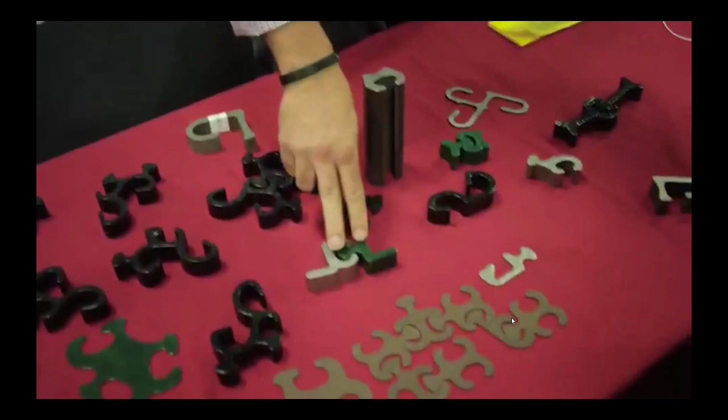I come because I like to learn about what is going on in the industry. I like to hear from the contractors, especially because being an engineer, sometimes it's good to learn from the contractors what innovations they're coming up with, and obviously to meet with other folks and see what they're working on.

This conference is probably the most important event during the calendar year, so you cannot miss it. Because here you can meet a lot of people, contractors, suppliers, competitors. So, as I said, it's the most important event in the calendar for the foundation business, and it's too important not to be here, let's say.

We come because we get a lot of exposure to people who use our equipment. Camaraderie, a lot of camaraderie. Even with our competitors, we come out and we rub shoulders. Everybody knows everybody. It's just one big happy family. Well, it depends on whether or not you want to continue learning. If you've got a desire to continue to learn, then you need to be at DFI.

The good thing about this conference, you can meet a lot of people over and over, so you can make a very good connection with the industry people. Networking's huge. There's so many people here, just from different parts of the country and the state and the world even, and just seeing what processes they're using and their design methods and their equipment, and just really a lot of exposure, and also getting connected with those people for potentially future work, future jobs.

Come join us if you're interested in anything in this industry. This is the place to be. This is it.

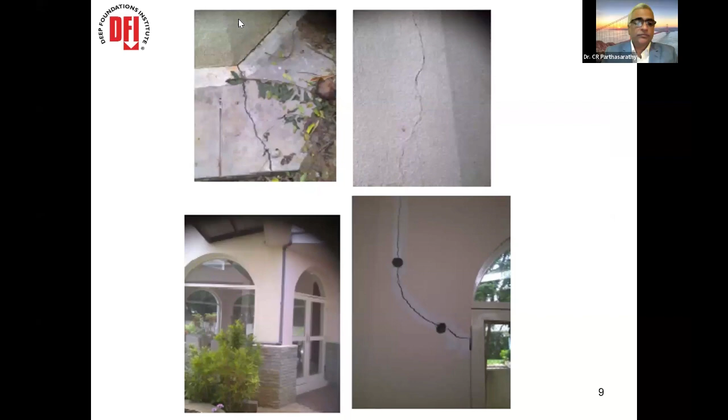So as we all know, any kind of structure, a small residential building or tall towers built on deep foundations or shallow foundations, are subjected to distress. Slope stability failures: even in the recent Wayanad slope failures, hundreds of people lost their lives. We have cases where residential buildings are under distress. A common man like you and me puts our life savings into a building, and then we see that the buildings are under distress. We can't live peacefully and happily.

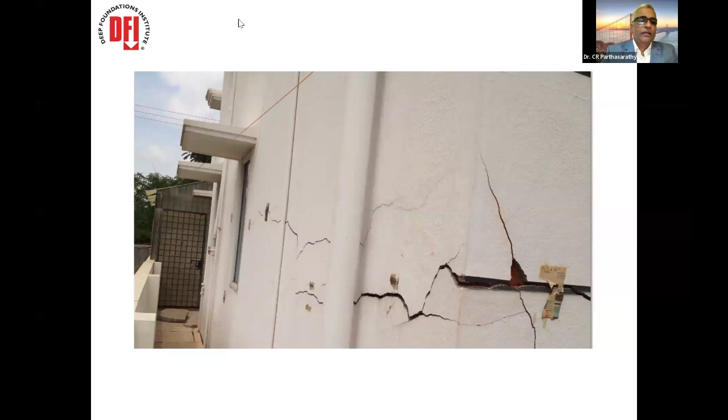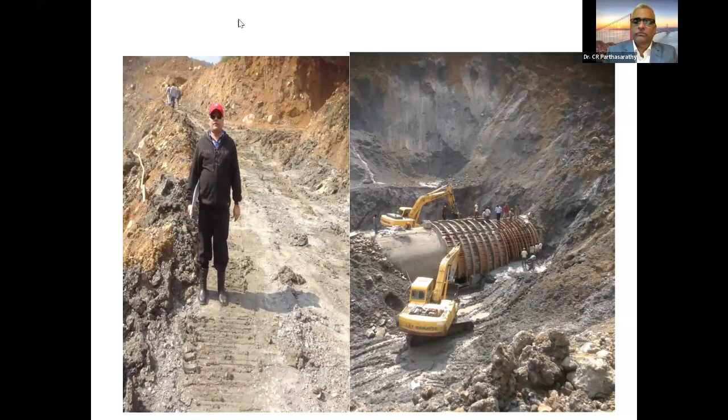Sometimes decisions are made without taking cognizance of the risks involved. Slope failures in cut and cover tunnel. I had an opportunity to visit one of the sites in the northeastern part. No protection, no planning, no safety, and it's all non-technical activities to do work in less time, shortcuts. Okay. We also are familiar with the information available in the public domain.

There are several structures that are under distress. Bridges are collapsing in Darjeeling, Arunachal Pradesh, Kolkata, you name the city, right? Stunning footage of foundation failure of a 3-story building collapse in India. I also had an experience of a building just adjacent to my own apartment a few years before, with loss of 3 lives. One of them was my security, who had nothing to do with the adjacent building, but he was a prey to that incident.

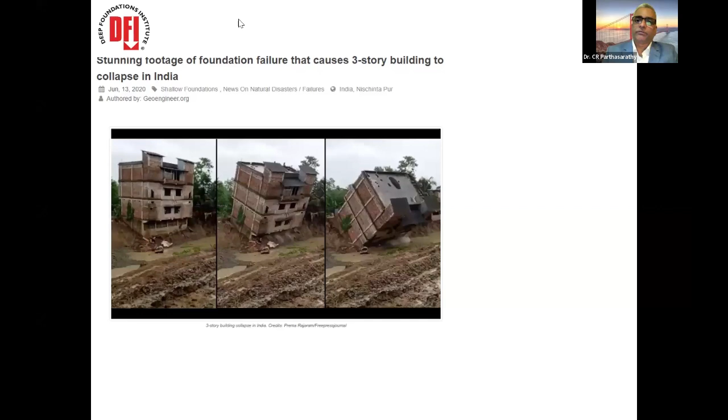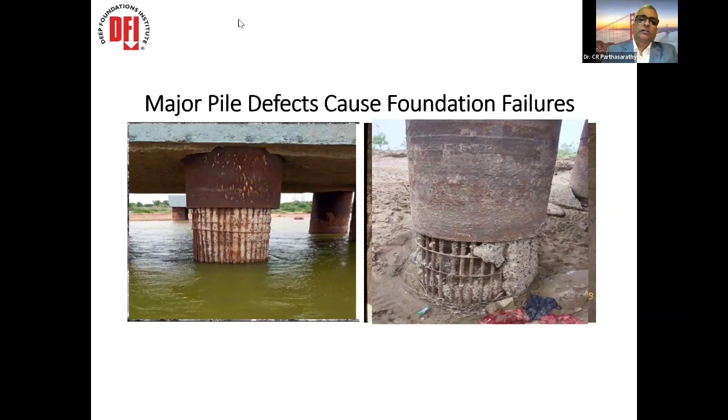Delhi building collapse is a classical example of a tall structure collapse. Recently, 14 Bihar bridges collapsed in 4 weeks. As professionals, it's unacceptable, I think, to every one of us here, right? Sometimes doing shortcuts leads to major defects in the foundation, perhaps erroneous designs leading to higher risk, time overrun, cost overrun. Economics and safety have to be considered. The bridges built unsafe lead to disaster if it's not attended to.

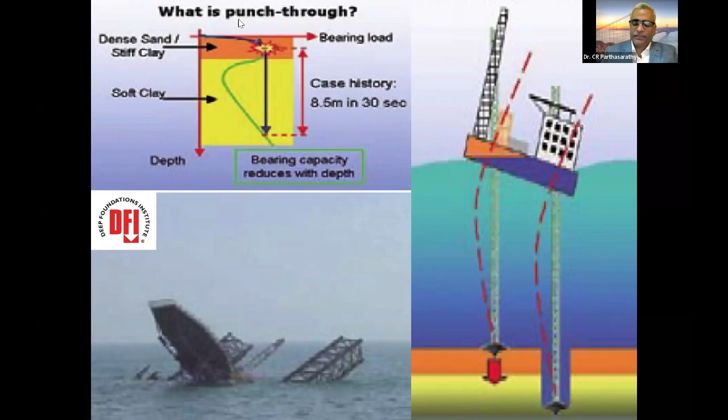It is just not the problem in the on-land infrastructure, but also in the marine offshore condition as well. We know structures are failing. We have these jacket structures coming down. Right. So friends, what are the causes for these challenges and distress? This high failure rate and infrastructure collapse leads to loss of life, loss of money, bad reputation.

It's not good at planning. Rushing takes priority over managing the risks. Financial constraints on projects. More importantly, not using technology, not having skilled people on the project. I emphasize this very strongly because of having some experience in the presentations that I make and also what I hear. It's too late in the game and then people think that they can fix it later. How can we mitigate this? Create awareness, bring in technology, induce skills, transfer knowledge, and have people with the experience learning.

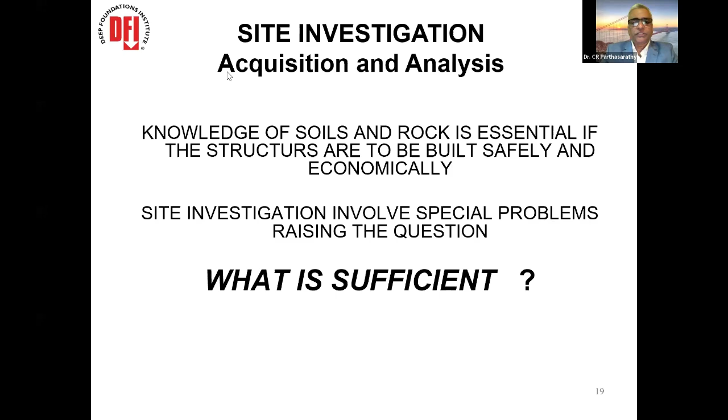Okay. So why is geotechnical investigation and site characterization required and necessary? The investigation is a prerequisite for safe and economical design of the substructure element. It is also necessary to obtain sufficient information for feasibility and economic studies of a proposed project. So this poses a very important question. What is sufficient? The characterization shall be sufficient enough to depict a three-dimensional picture where you can map the lateral continuity or discontinuity of the layers horizontally, as well as stratify the layers vertically and develop the strength parameters. And this information is used for the design of foundations.

So what is the outcome of a thorough or proper site investigation? A, you get to know the stratigraphy. B, you get to know the strength parameters. C, you know what are the risks that this stratigraphy poses on the intended projects and how to mitigate those risks ahead of time so that you can eliminate all those hazards and be successful on the project.

When you're talking India, $1.5 trillion of investment into the infrastructure pipeline is committed from the government in the next several years. They are going to build huge infrastructure across the length and breadth of the country. At this scale, we have serious conflict of the resources available. There is a capacity demand conflict. And it's just not for the infrastructure and other development happening in India alone. India is producing a talent pool that other parts of the world are also looking at. The entire Middle East, we are contributing to the projects.

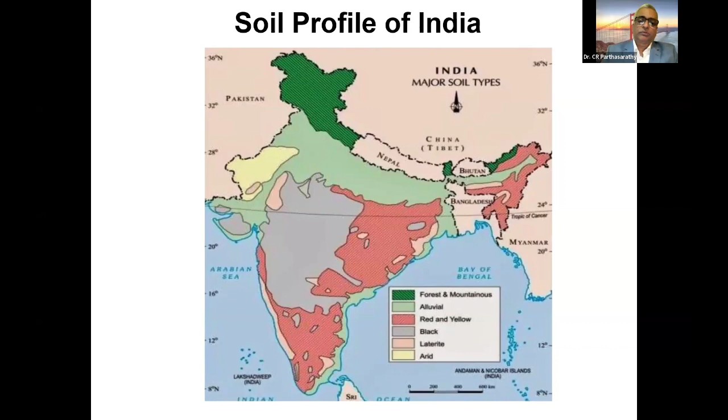So routinely, the standard penetration test has been practiced for decades, more than 85%, and is one of the most used methods in geotechnical characterization, but apparently it is also not a standardized practice in the field. So I want to emphasize a few case studies to see how it can be mitigated and how the current practice is going on.

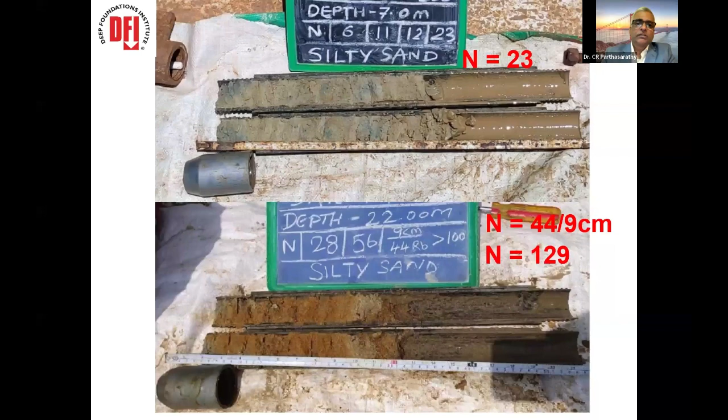So the first-hand information when you look at the data is always the best information. The person standing on the site, maybe a senior technician or an engineer, looks at the samples. He says, yes, these are undisturbed samples. You're driving the SPT split spoon sampler into the virgin ground. Click pictures, record it. Huge value for this information, and also the quantity of material that is collected. So all the drill fluid, the wash cuttings are taken out. You're also ensuring that the penetration is happening into the virgin ground.

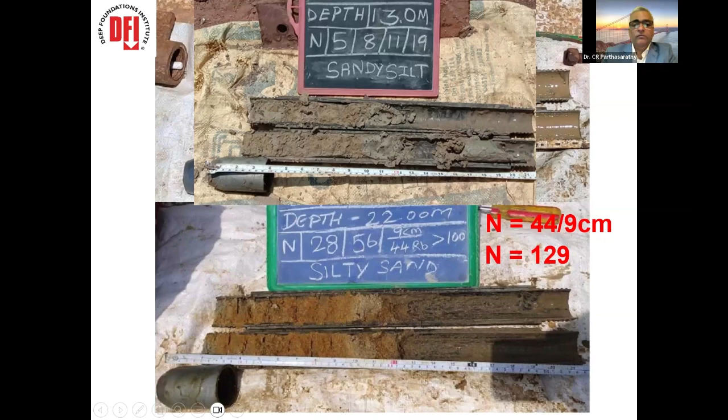If you have a very competent material, a refusal stratum where the split spoon is not penetrating with the hammer blows, at least you know that this is the original material that you have hit, and you are confident that there is competent material at the intended depth. These are very simple things, ladies and gentlemen, but they give immense value for you to make decisions in the current scheme of things.

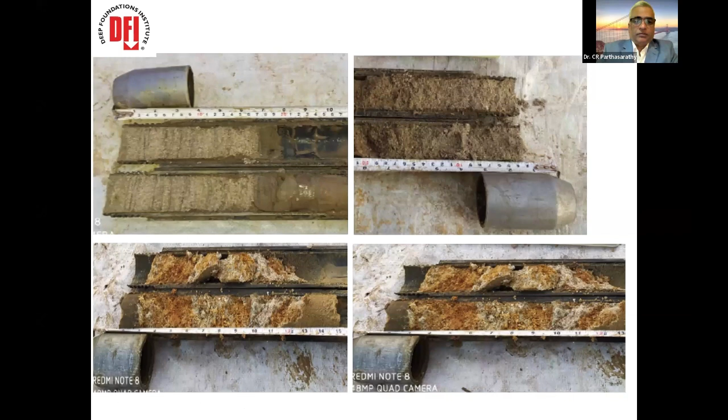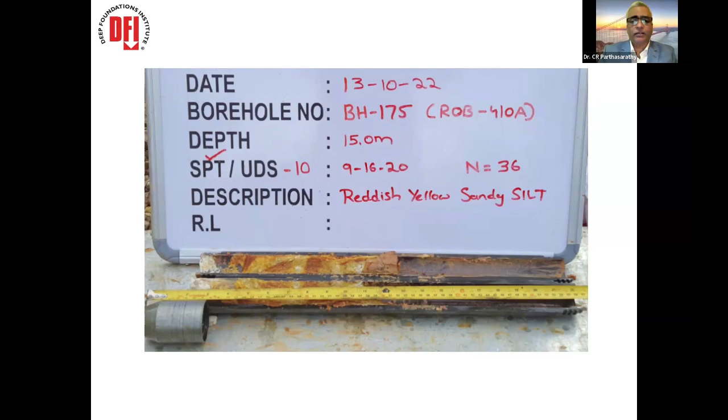Even in sand, you need to know if this is real undisturbed ground or virgin ground you are conducting the test in, or is it something else, right? Many more. So it should be a practice that we collect on-site first-hand information with proper testing.

Oftentimes, we also see that there are no samples recovered in the test because it's very, very competent, and boreholes are continued without doing any other remedial measures. So if you see a refusal with no samples, the next thing probably is very competent. You may have to core it to see if there is any material that is coming out.

But we see oftentimes that the boreholes are continued and these no-recovery samples continue to the end of the borehole. So you don't have a sample and you're only left with a refusal R value, sometimes it's 100, sometimes it's 50, whatever the user writes there, and we have to deal with that.

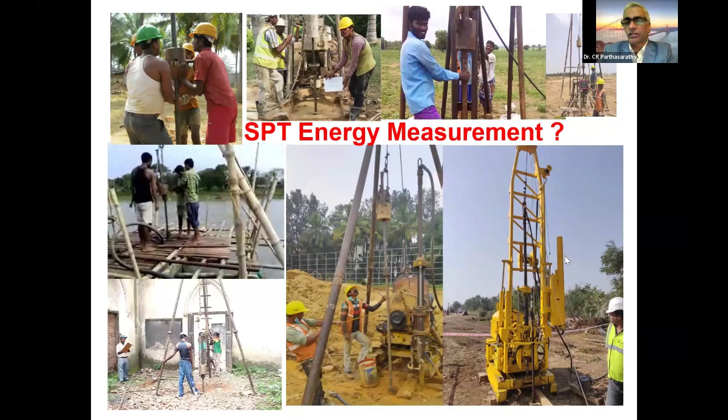Conducting this test itself, although it's the standard penetration test, it's not standard. We are not sure how much energy is transferred to the drill rod. So we have actually calibrated several rigs operating in the region, and we found that tests performed with a rope and a pulley impart only about 25 to 40% energy transfer. But if you use an auto trip hammer, which the codes prescribe, we end up having about 55 to 65%.

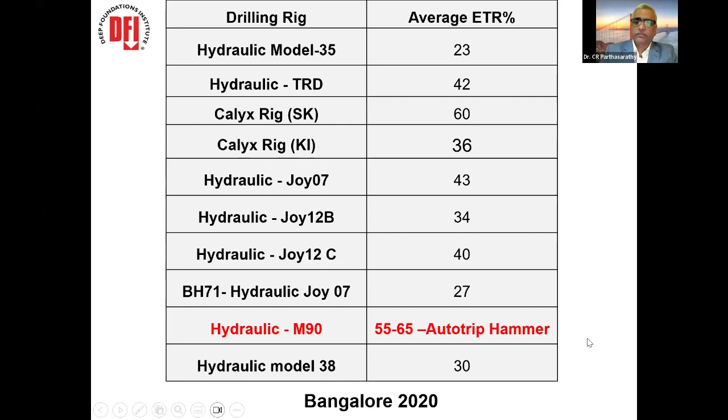With the conventional empirical equations, we do not want to have any adjustment if you use an auto trip hammer, but there is a huge adjustment which over-predicts the bearing capacity. And therefore it's imperative that we calibrate the rigs operating on a project. We did that on many occasions. For several of the rigs, we found again this 25 to 40% with more database.

In fact, this energy measurement started with the high-speed rail project during COVID time in India. The Japanese wanted to have this measured for every rig, and now it is pretty much a practice. Although it's not 100%, on important projects energy measurement has been made, but equally there are projects which don't even prescribe this energy measurement.

Our Indian Standard Code IS 2131 specifies field correction using energy measurement, not mandatorily, but as an option. So I hope in the subsequent revision they make it mandatory. In the Western world it has become pretty much common in most of their projects.

If you are using a high-end drilling rig with an automatic hammer, you also tend to have a very high energy transfer; 80–90% and above is not uncommon. So when you're still using the current empirical equations, not correcting for this high energy transfer will be detrimental to the economics of the foundation.

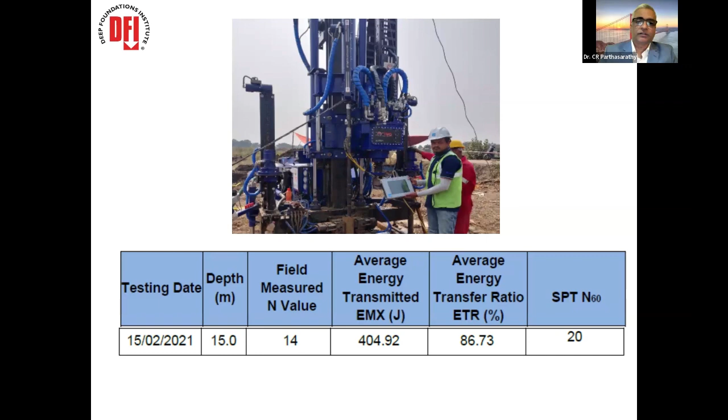Just to give you an example, a pile capacity based on only the overburden correction, and this is based on field corrections using the energy, you are multiplying a factor of 1.3 or 1.4 as the case may be. For a 600 metric tons of required capacity, you end up having a 7-meter difference in the pile length. And same way, if it is for 1,000 metric tons capacity, it's 42 to 47, 48%, about 6–7 meters of pile length. Thousands of piles you're constructing and huge cost savings you can economize.

And this economy of foundation is not only on piles. There are also published literatures on tank foundations not doing ground improvement because they have adopted the corrected N values based on energy measurements, which otherwise would have cost them millions of dollars in the ground improvement.

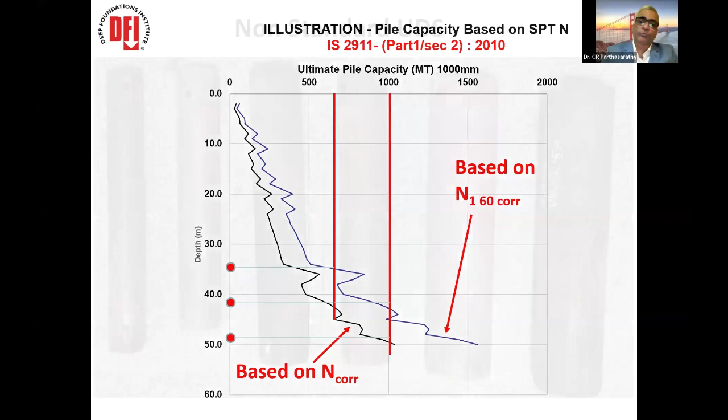So field part is one, so you need to have good first-hand information. Properly, you should be able to identify it is a good sample, a bad sample, energy measurements, and correct it and normalize it. That will actually elevate the standards of work that we are doing. So now, in situ test is one part, laboratory test is another part. In order to perform high quality laboratory test, you also need to have high quality undisturbed samples.

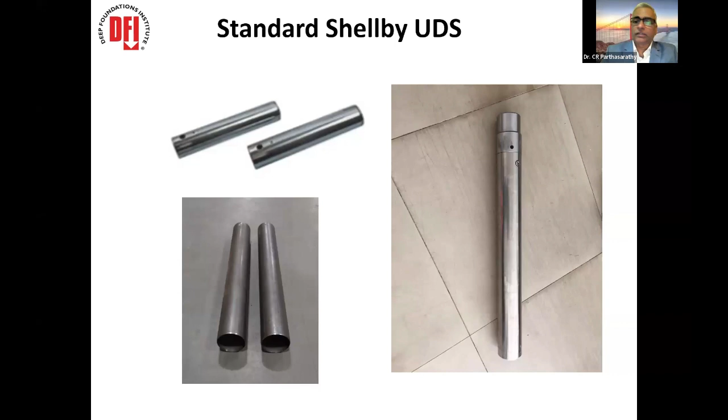So we are having varied samplers, although prescriptions are to use Shelby tubes, which have a good area ratio that can make the samples high quality with least disturbance. So this should be a practice, and in most of the cases today we are seeing these tubes are driven in the ground because there is no capacity of the rigs to push statically. So many projects drive the undisturbed sampler, which actually disturbs the samples too.

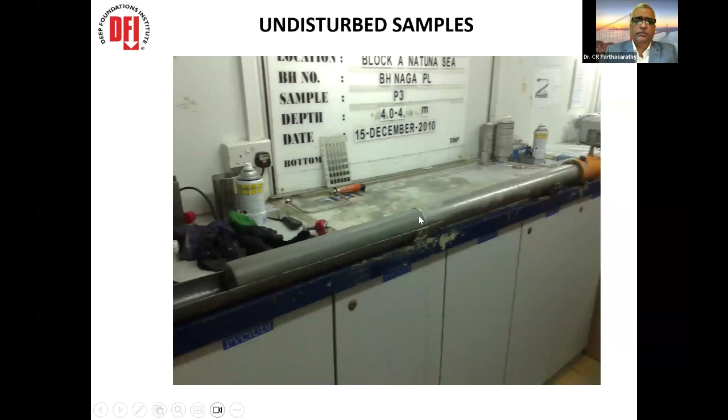And when we are performing a high quality, sophisticated test, no matter how high quality or high value those tests can bring in, these samples are very, very critical to meet those objectives. If you are able to push good samples, even in soft clays, you can recover high quality samples.

But oftentimes, if you're not taking care of the drilling process, you may end up having all the fines washed away, and you see those wash samples coming to the ground, and we're trying to collect them in a plastic bag, and you characterize that these are all cohesionless material, although the matrix is different; as a mass it is all clayey sand or sandy clay. So we end up having the wrong classification of the material.

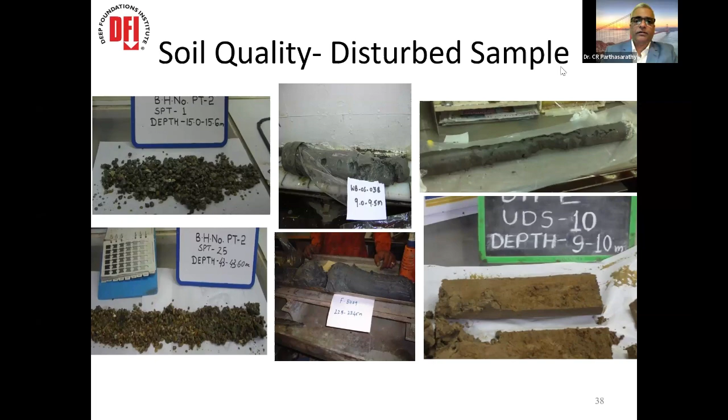And same thing you're seeing on the left side. These are not the gravels and the pebbles. These are clayey sand with some amount of gravel. Well, all the fines are gone because you're not able to wash the boreholes properly, and thereby you're ending up in wrong characterizations. So wrong characterizations also have a cascading effect on your decisions over the life cycle of the project.

Rock cores are another important aspect. Once you see the refusal stratum, the next step is to see that you can collect core samples using the core barrels and the other tools. A very important aspect here is to ensure that you are using the right type of tools, particularly the bits, the reamer shells, the core catchers, and what kind of bits you are using. So what its hardness is depends on the material that you are coring in.

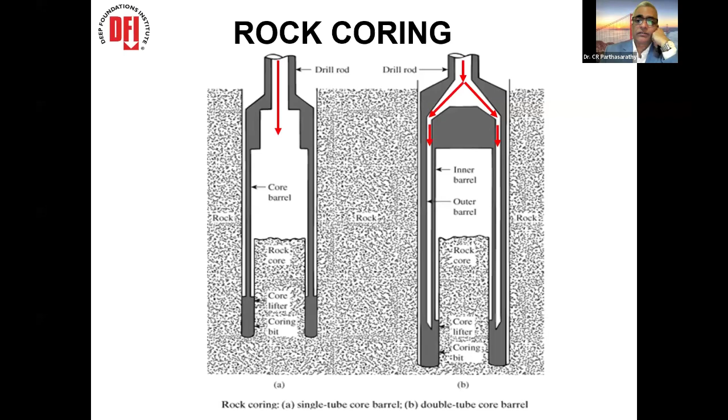Here, you definitely require to understand these drilling aspects, coring aspects, and what kinds of tools are necessary. Otherwise, using the wrong tools will end up not having any progress, or you're going to have some bad quality core samples. Even using triple tube core barrel is not an uncommon practice. It's definitely required for transition layers in residual deposits to collect those intermediate layers and quantify those layers.

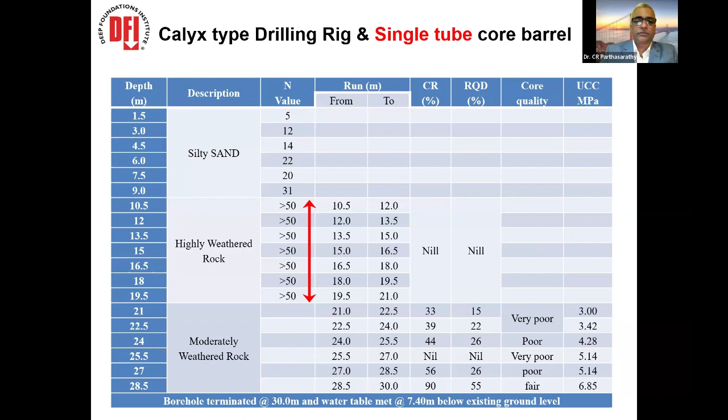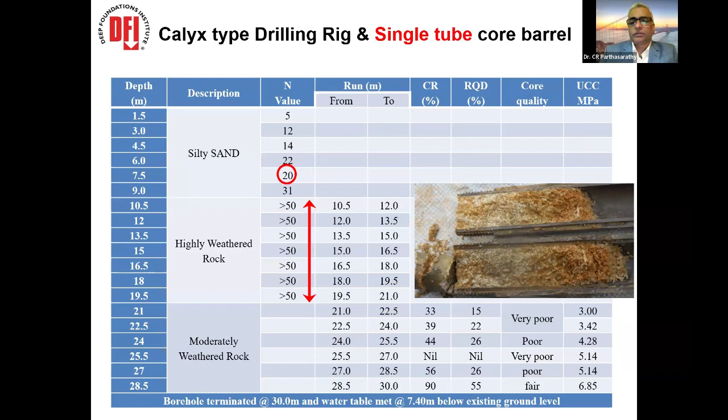I'll give you one example. When you have overburden up to 9 meters, then you have this refusal to SPT. We just record it as N equal to 50 at all the depths until about 20 meters. And then you have this bedrock. So there's no core recovery, there is no RQD. So we end up having only N equal to 50, maybe no samples. And we tend to use those N equal to 50, or now N equal to 100, to evaluate your bearing capacity, pile capacity, and so on.

But with a simple change in the tooling, you use a triple tube core barrel and try to core the material. You will end up having good core samples with decent recovery and also a good amount of samples that you can test, to ensure your unconfined compressive strengths are measured around 3 megapascals.

So in the absence of triple tube core barrels, we tend to underpredict the bearing capacity. But more than just the bearing capacity scenario, it also leads to other risks. For example, the excavation in this material. So if you have a Poclain which can excavate this overburden, and for sheet rock, you have many other means of excavation, diamond cutting and others. But this intermediate layer is neither an overburden nor a sheet rock, so there's always a conflict.

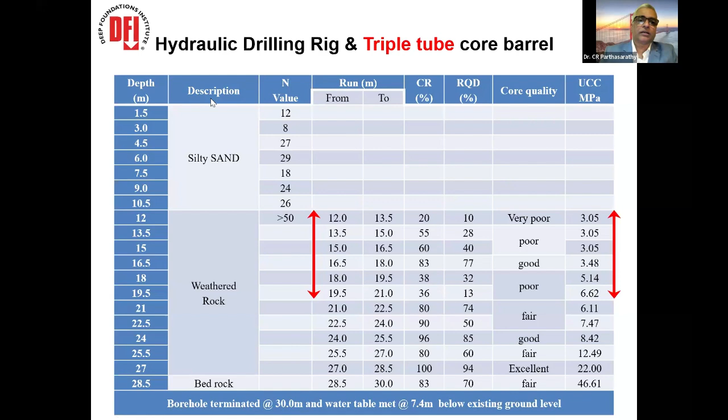As we speak, I know there are 2 projects under litigation between the owner and the contractor because it's not quantified properly. So proper quantification helps mitigate these risks and also avoid conflict, which can also minimize the time and the cost overrun on the project.

So with this simple quality on the collection of core samples using triple tubes, you can actually predict a higher pile capacity, or foundation capacity. Just as an illustration I've given here, based on N equal to 50, where your allowable capacity on the point bearing is around 1 MPa, it could be around 5.5 MPa because you have a measured unconfined compressive strength.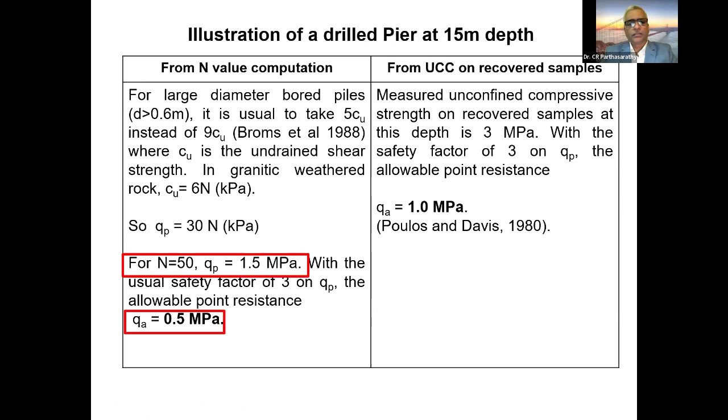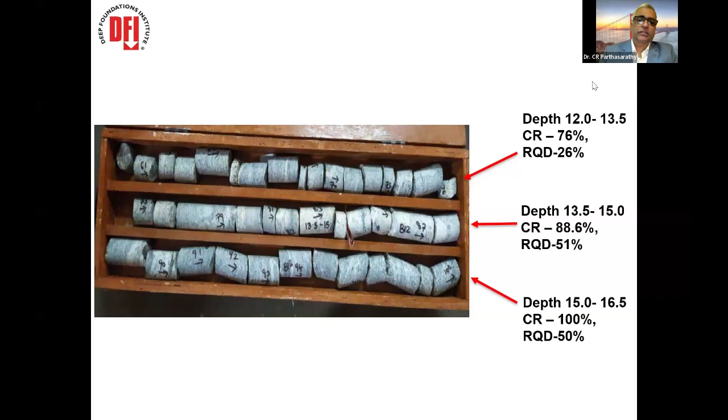Now, our IS code also gives a guideline to classify this rock mass. So these are fresh rocks, broken pieces, and if you classify this rock, it is classified as a poor rock because it's already broken. So is the rock so bad that you get these broken pieces, or is it something else? I think it's drilling disturbance having mechanical fractures.

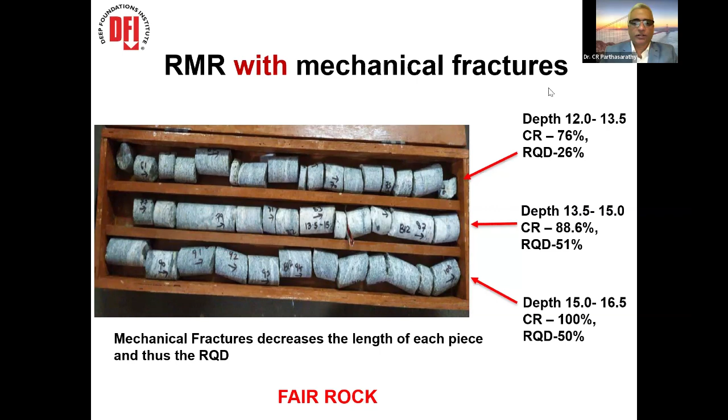So when you have this rock mass rating with these mechanical fractures, you classify this as a fair rock. But if you use some good drilling tools and collect good core samples, I'm sure you can get a nice core in this kind of fresh rock. Your fair rock can be classified as good rock. So in such a case, experienced geologists tend to group those core samples and improve the RQD. I don't encourage this. This is the last resort.

But for all our young colleagues and friends here, please try to do a good job in the first place. Okay. So in trying to group, you're improving the RQD, then you're trying to improve the rock mass from fair to good. This is a last resort.

I repeat again, the first thing is to ensure that you collect high quality core samples by implementing good practices: put a good rig, put some good geologists on the site, and also use good consumables on the project, like your drilling bits and other tooling as appropriate to the material encountered, and thereby you'll be able to recover good core samples. Let me illustrate a few examples, and then we will take some questions.

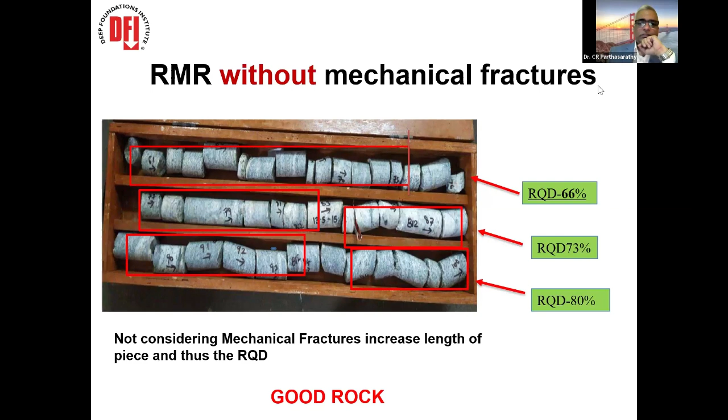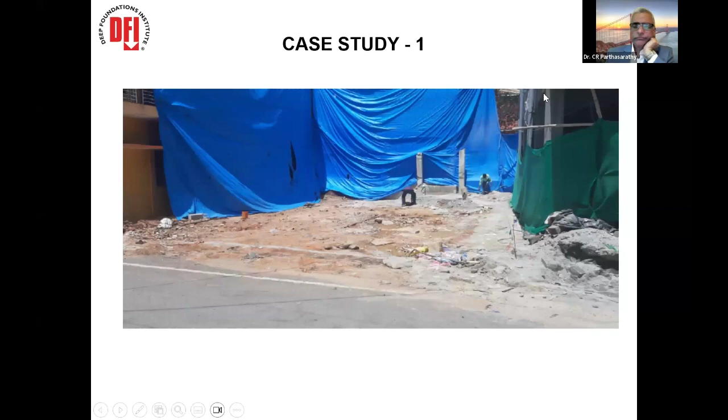This is a very small project, small site, 30 by 40 feet. One of the owners intended to build a residential building of 2-3 floors. As usual, you do a borehole by manual augering. It's very common in Bangalore and other regions. I've seen that a manual auger is used, and you get your N values.

And the owner of this building is a project management professional who handles crores of rupees projects across the country. Looking at these N values, which are very, very weak, around 2 to 4, he is a little concerned about his own building. Then he said, no, we don't want to go by this. So let's have another investigation using a machine.

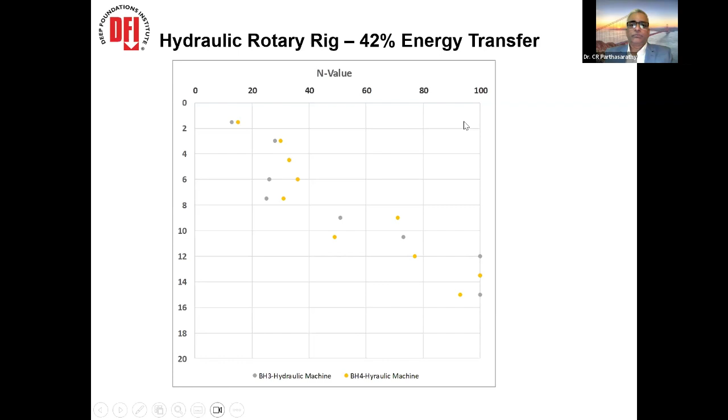A hydraulic machine, you make energy measurements, which results in N values higher than what the auger boreholes gave you, right? Again, conflicting information, puzzled, unable to make a decision. Then you correct it for overburden and energy, and then you get this, okay? There are two values available for you. What is right? Don't know. So people are puzzled.

The only way that you can decide on this is to have first-hand information on the ground. If the people on the ground do not give you first-hand information, then it's very, very difficult. So better you go to the site, look at the surroundings, look at the soil samples, and arrive at your own judgment.

From this investigation, there were some samples that were collected. When you actually examine the samples, this was tested for shear strength, and the sample is standing on its own.

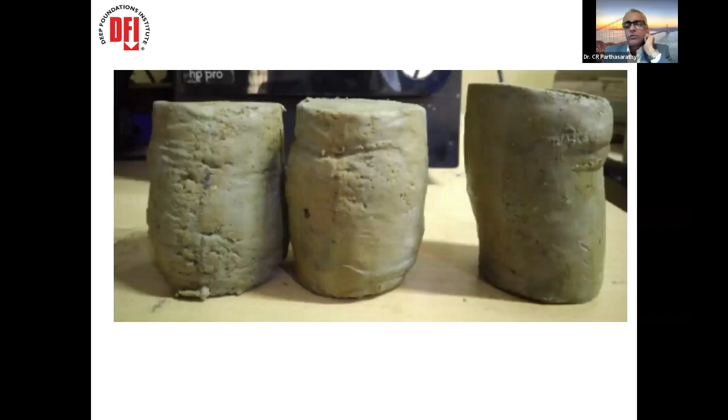Okay, and it yields an undrained shear strength of about 50 kilopascal. So when you examine this soil, these are stiff clays, right? So with stiff clay, the N value cannot be 2 or 3. It should be slightly higher. With our normal correlation of 5 times N is your shear strength, you back-calculate N equal to 10, which corresponds to those values developed by the machine, not the auger.

So with a high water table in the auger boreholes, you tend to screw the auger into the ground, and with so much force you pull, there's a suction created which actually disturbs the ground, and if you perform an SPT, you will not get any value. So it's a simple technique, and I was able to analyze this because 30 years back, I myself worked for 5 years on these auger boreholes, about 600 to 700 projects. So something is not correct there.

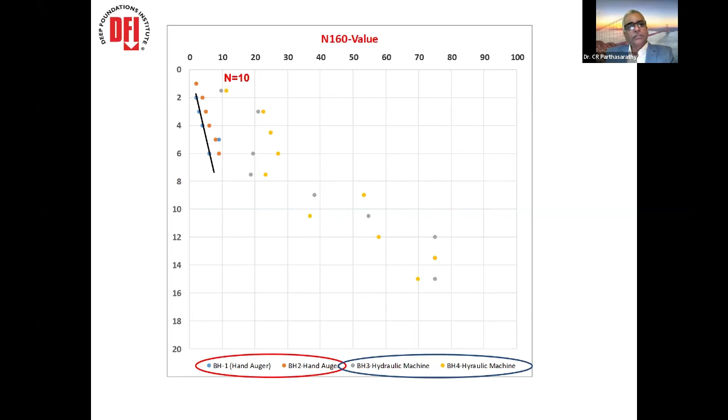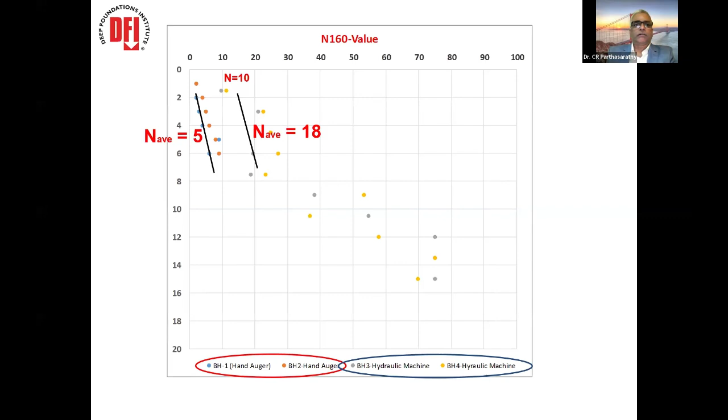And when we look at the samples, it's showing something different, contrary to the N value measured by the auger boreholes. Then we discarded that and took the values from the machine. And look at the site, the adjacent building is constructed for 4 floors and is standing just next to this building. So that also gave confidence that what we evaluated is the right thing, and we asked them to proceed further with the construction.

This is the adjacent building already standing for 4 floors, and this one about 2-3 floors. And finally, the building was completed. Now the owner is happy in the building. So what is one thing that we can relate in this project? The proper skill that you require to identify a soft clay against a stiff clay. Simple things, but we do not have this skill on the site, on the projects, in most cases.

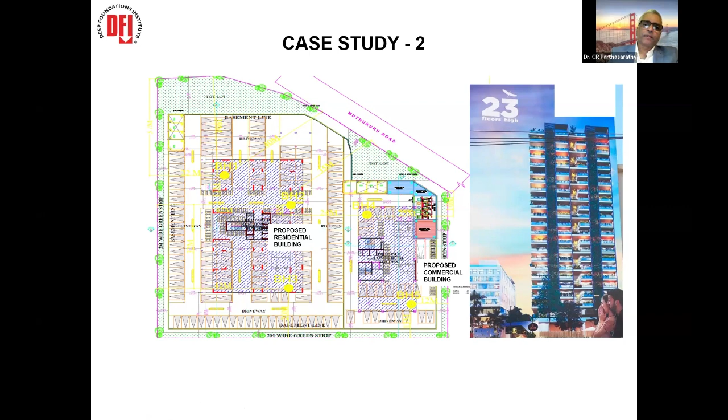Another one, this was one of the projects in Andhra Pradesh. They had a huge land parcel. They planned a 23-story tower on one side and a commercial building on the other side, a small piece of land on the commercial side. A local contractor was engaged to do the investigation, and all the information you have, which you are seeing on the screen, is N values.

Is this a standard N value? Is it measured with energy? No information. I'm sure there is no energy measurement, nor was the practice a standard practice. There were no auto trip hammers, I believe. It's rope and pulley, and even the rope would be a wire line, steel wires, that would actually give you very wrong information on those measurements.

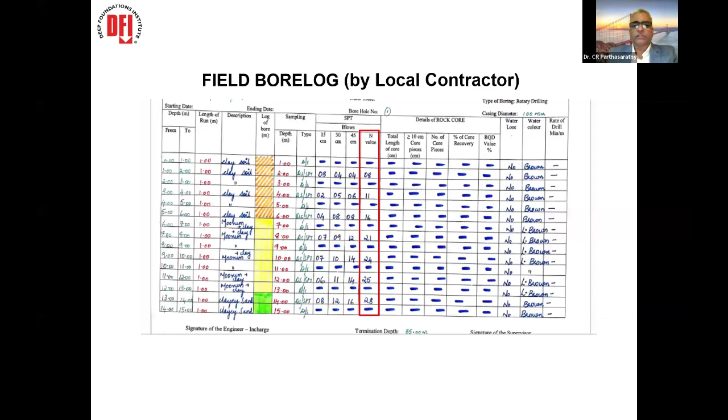So this was used by the consultant, and you see the N values plot so nicely. All of them are plotting together. It's very surprising. And from these N values, it was concluded that you have to go for a piled raft system, that the current stratigraphy is unable to withstand the load from that high-rise building. So given the stratigraphy and the strength parameters, the consultant said that, in my opinion, the piled raft system appears to be more appropriate for the site.

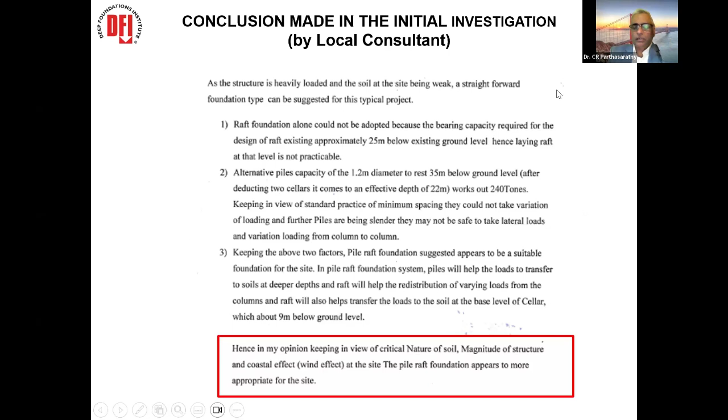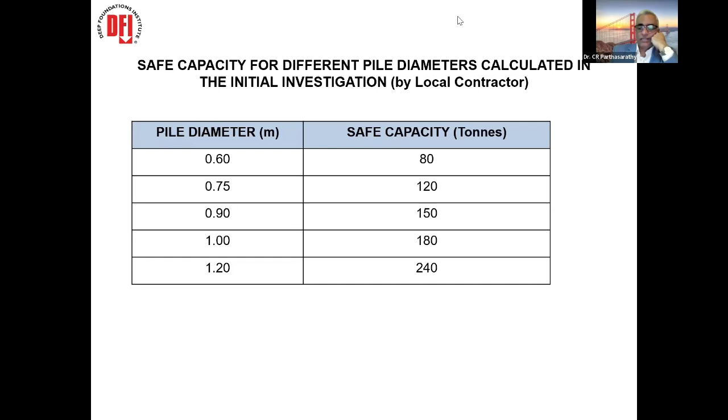This cost a lot of money for the structural engineer, and he was not happy, since the structural engineer himself visited the site when the excavation was made. Somehow he felt that this was contrary to the site conditions. So a reinvestigation was proposed, and here are the boreholes where the reinvestigations have been performed.

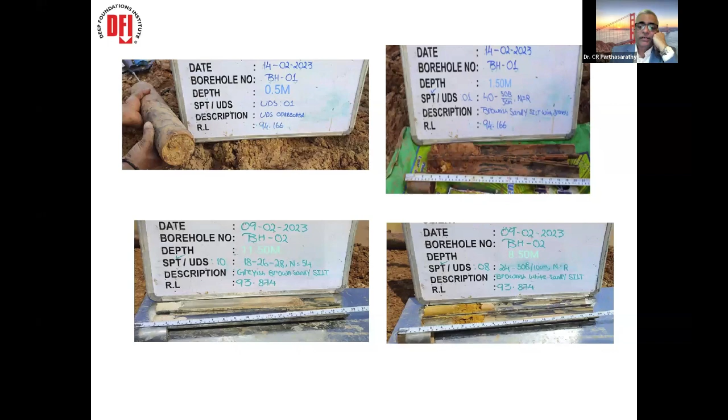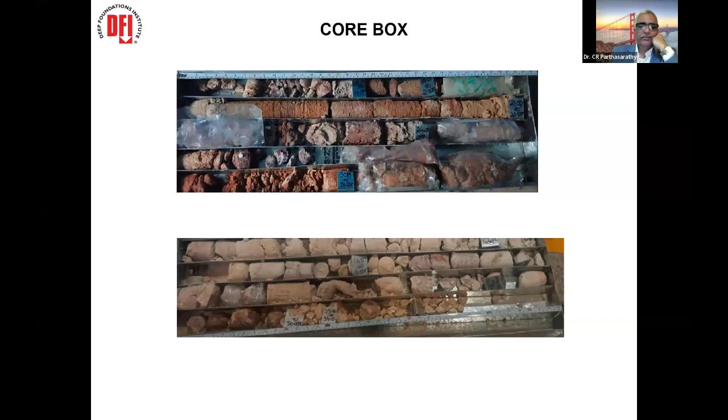The samples were collected, and you could see the refusal stratum at a very shallow depth. And the refusal stratum was not even met up to 35-meter depth in the initial case. And there are cemented rock layers, cemented compact material. And it's totally different, 180 degrees apart from the previous investigation to this investigation. So with this latest information, first-hand information, there weren't any samples in the earlier investigations to look at.

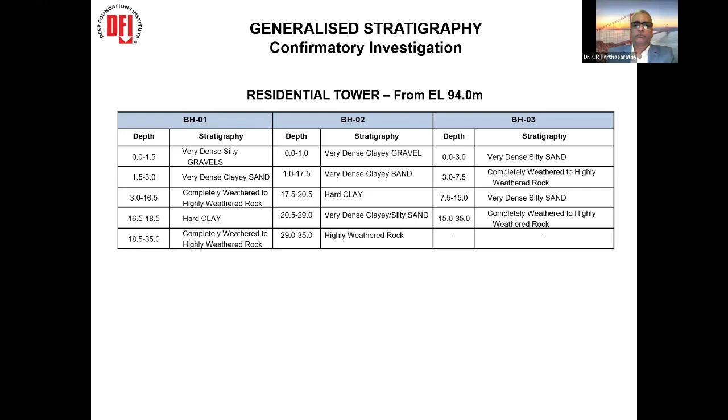You have very high confidence that you can vouch for this material because you have physical observation, and also the samples are collected and tested in the laboratory. There are field tests also being performed. Then the ground model was developed. And finally, it was recommended to go for a raft for the high-rise building and normal isolated footings for the commercial building.

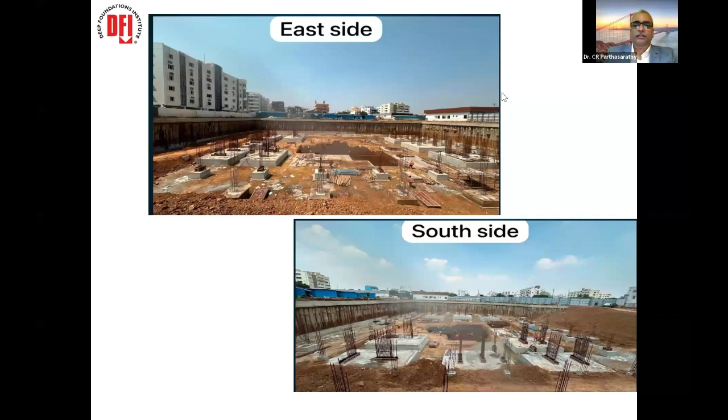Okay. Now, in the building, 2 months back, they already started with isolated footings and intermittent raft. I think now probably several floors would have already come up. So there's something common between the previous one and this one. So what is common between the previous and this one? Please type it out in the chat box. I'll come back and see after my presentation.

So I acknowledge the team that was involved in this project very professionally at all stages, including the site, for thorough management, data acquisition from the site, in situ testing, there were geophysical methods, pressure meter, and so on, laboratory tests performed, and also the engineering report, which apparently saved, I think, crores of rupees to the project.

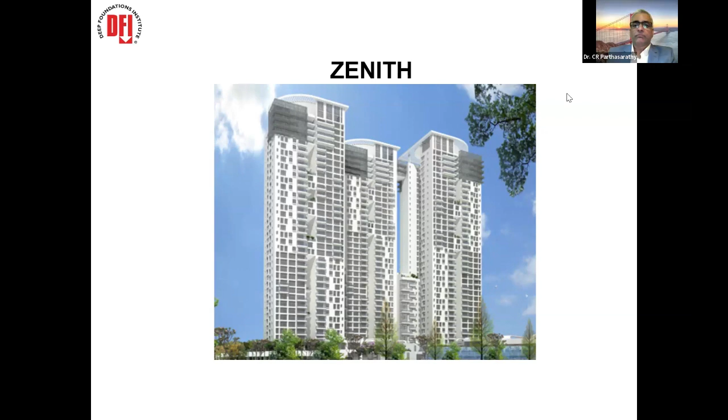We did not get paid for many crores, but we are talking about sustainability. I think doing the right thing in the first place is the way to go, right? And we had similar experiences in the past, several years before, on this building, Mantri Espana, and this is Zenith Towers. It's on the airport highway, doing reinvestigations and actually eliminating pile foundation on this project, tall towers.

Where it is not necessary, you don't need piles. Where it is necessary, you tend to use piles. So thorough investigations are required on any project, and this can come only when you have the right attitude with the right people at the right place at the right time. Okay.

This was a refinery project for tank farms. So for one of the tank farms, I just picked up 2 boreholes here, which gave N values, as you can see here, location 1 and 2. And you have the refusal stratum below 15 meters.

But the rods that were used were not standard rods. They were non-standard rods. Then you tend to redo it on a bump-over borehole. Okay, it's an adjacent borehole. Repeat this again with standard boreholes with standard energy measurements. You tend to have the N values contrary to the previous ones.

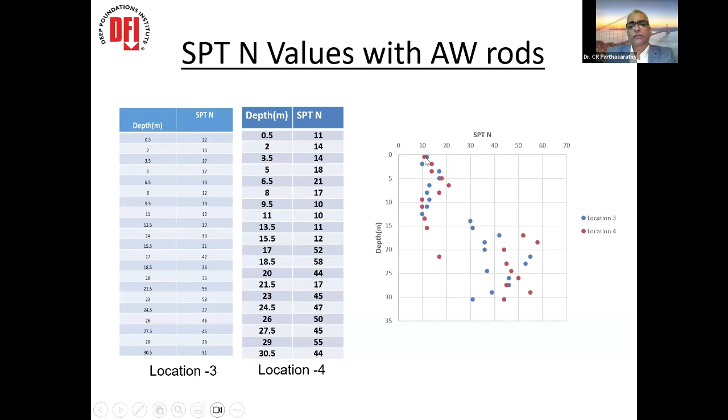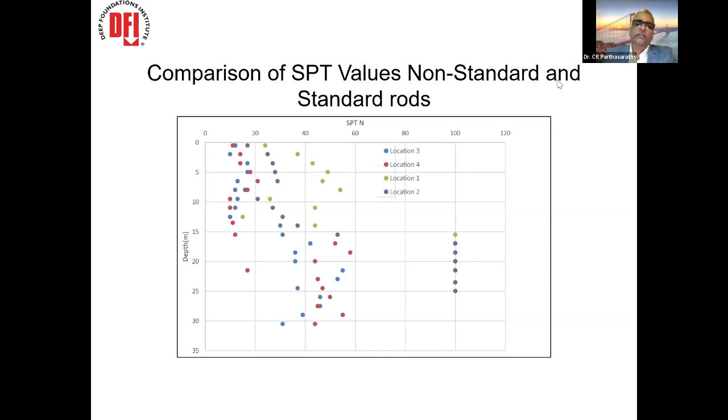Okay, now you put everything together. Some of those rigs are telling you it's a refusal stratum, and the other rigs are not indicating any refusal. Same contractor with different rigs or different contractor, doesn't matter. As long as we follow the procedure, I think the data should be okay, right? We tend to use that.

The second one gave you less N values, and this also corroborated very well with an adjacent CPT test that was performed up to the depth intended. So the CPT and SPT correlations gave confidence that we have to use the standard rods and ignore those values that came from non-standard rods without any energy measurements.

Okay, this has a huge impact on the foundation assessment, particularly when you are making settlement computations on the projects. So thereby we are able to solve these problems and overcome the risk that would otherwise have predicted lesser settlements than the current ones.

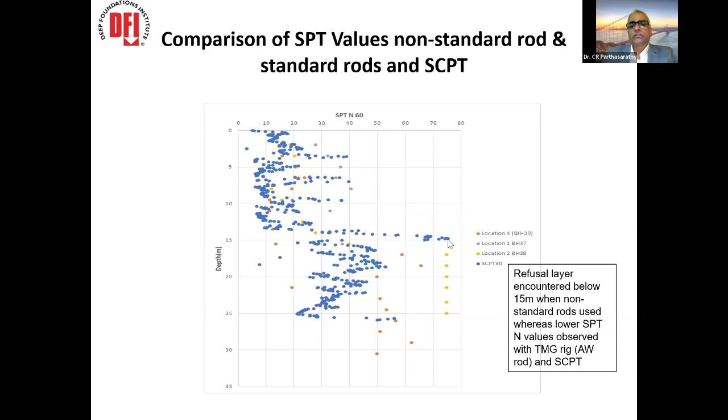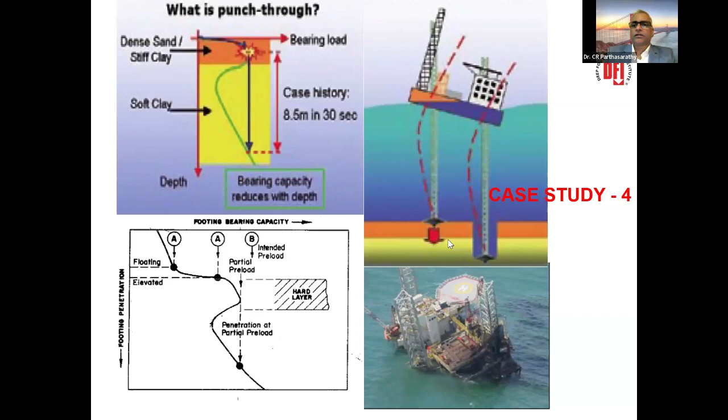2 factors are important. One is the factor of safety, peak bearing capacity to the preload, and the measured to required strength ratio. This should be close to unity and this should be more than 1.5. So you don't have any failure or rapid leg penetration.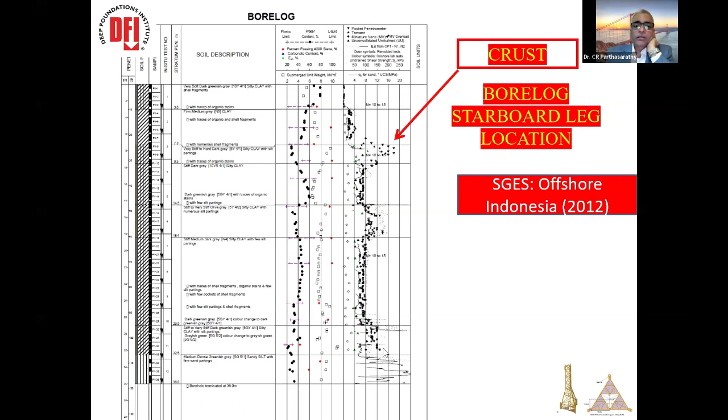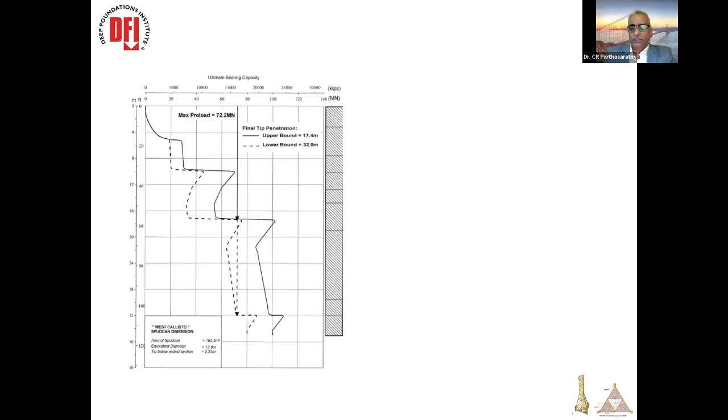The contractor arrived at 32 meters of leg penetration. With this leg penetration, which was predicted, the rig that was chartered was not usable on the project because it didn't have enough leg length. The client was puzzled. Then we really looked into the data, and we predicted it could only be 9 to 14 meters.

How confident are you on these predictions, contrary to the contractor? This was about 10 years back. I personally was managing this large-scale geotechnical investigation. And I made a decision to terminate the borehole at 35 meters because I predicted the rig will stop at the top of the crustal layer because there's a stiff clay at the bottom layers.

And you need to have around 1.5 to 2 times the diameter of the foundation, or the spud cans we call, below the predicted level. And that 35 meters was good. So I was totally confident because you had first-hand information, you had a feel of the soil for yourself, and then you had measurements witnessed on board.

So the client did use this data, and the rig went to the location. It experienced similar penetration, and later on the jacket was installed, and we were also involved with another contractor for the pile driving monitoring as well on the same project.

So why this contractor predicted deeper penetration is because they were not able to develop a strength profile, particularly undrained shear strength, that was relevant to the site. So under-predicting the shear strength led to deeper penetration.

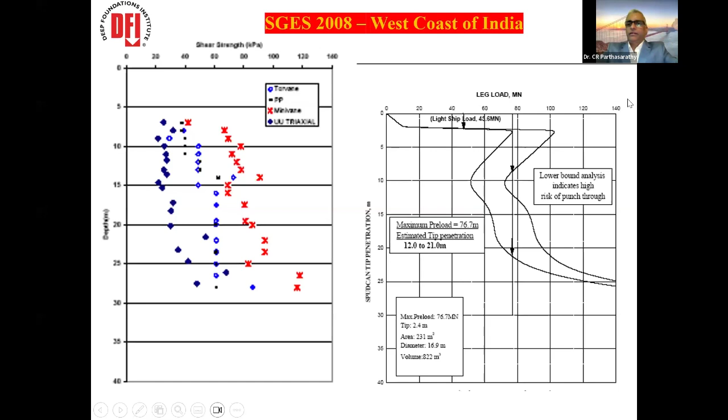So with this very low shear strength profile, you end up having a leg penetration like this, indicating that the legs will have a rapid penetration from here until here. No warranty surveyor will approve this kind of high-risk location. There was something not okay with this data because there were many rigs operating in the region. The client was puzzled. Then it was decided to go back and redo the investigation.

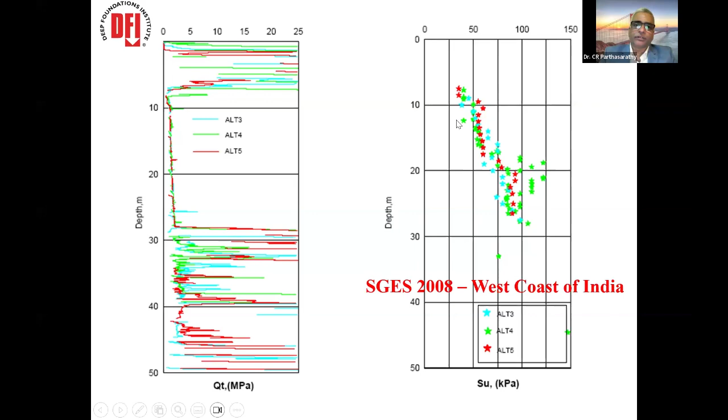An expensive, costly affair. Now everything is on top of each other under strict supervision, both the in situ testing as well as the measured shear strength, unlike the previous case. So this resulted in no risk, where all the legs of the jackup rig would stop at the top of the layer. Similar thing: wrong characterization of the soils.

The torvane test we use is a very simple test. You need to put the blade into the soil and shear with a uniform vertical pressure. But the skill of the operator who does the test is very important. Instead of shearing, it tends to slip, and it under-predicts the shear strength. That's one reason. The other reason is the calibration of the proving rings was not available, so they used the wrong conversion factor and reported very soft clays, although the clay was stiff clay.

But the person doing the testing should be able to feel for himself whether it's soft clay or stiff clay. Just by punching your finger into the material, you should be able to find out the consistency of the material. That is where the skill is required. It's a huge cost.

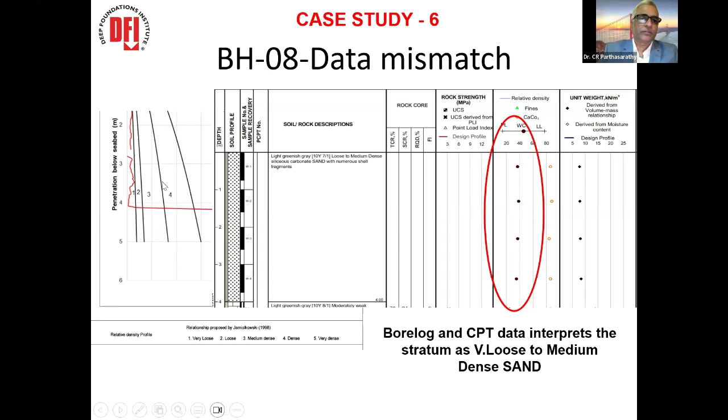The last one is a shallow borehole, a 3-4 meter borehole. You see the water content is around 40%. The CPT data tells us it's cohesionless material, very loose in relative density. This is a Jamiolkowski curve for interpretation of CPT data. When you go to the laboratory, you have a different moisture content and also a friction angle of 38 degrees. This is for a pipeline project.

If you have this disparity in the parameters, it has a huge impact on your pipeline design. If it's dense sand, the pipeline will not undergo any embedment, which has issues with lateral buckling or the stability of the pipeline. But the material is very loose and the CPT is penetrating with a very low cone resistance. So you can't have contradicting information between the field and the lab. Okay.

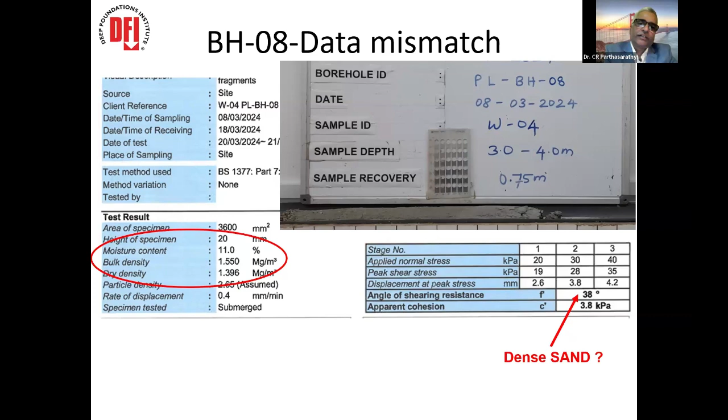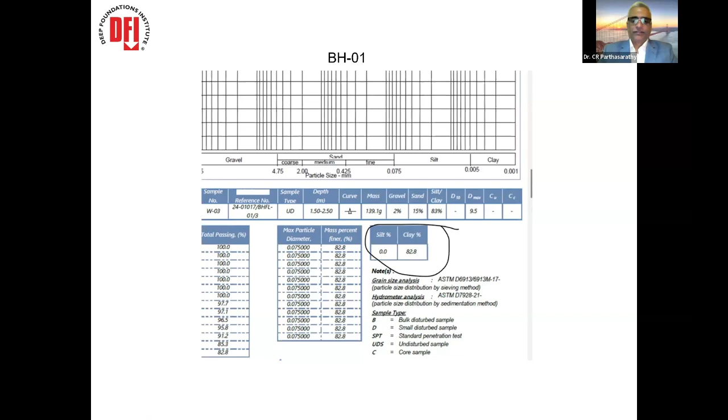And this one again: description of the material is also equally important. You say it is sand and report a friction angle, but when you look at the grain size distribution of the same sample, it ends up having 82% clay. So should you consider a drained case or an undrained case in your analysis? People are puzzled. A lot of rift between different stakeholders on a project.

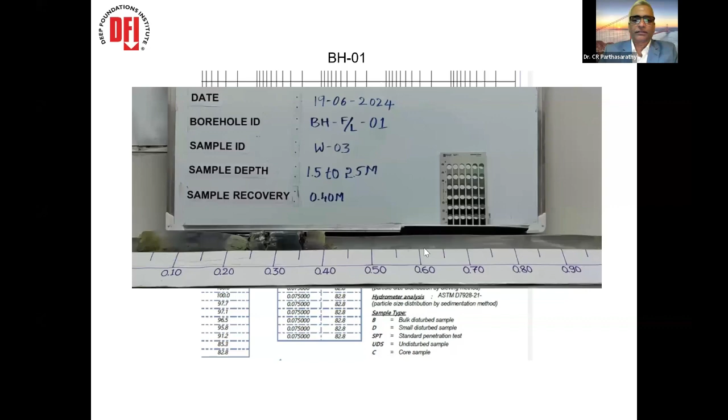And finally, this is a clayey sand. It's not that 82%; somewhere something is wrong. We're trying to investigate. So all of them have one thing in common. Can you please put it in the chat box? What is the one thing in common in all these case studies that I have just explained to you?

So in summary, you need to have an integrated approach to site survey, including geophysics, which I did not talk about today because of paucity of time.

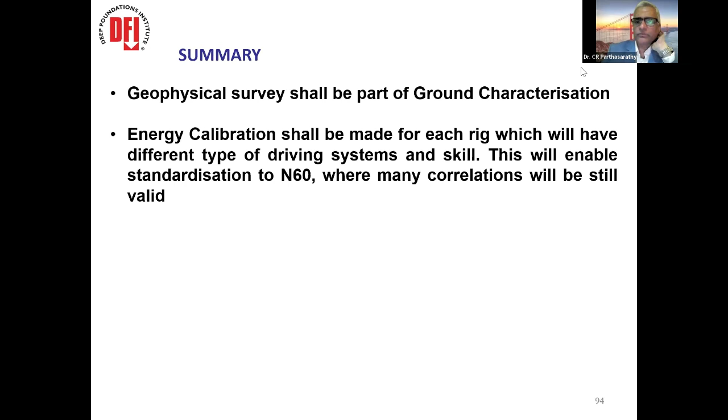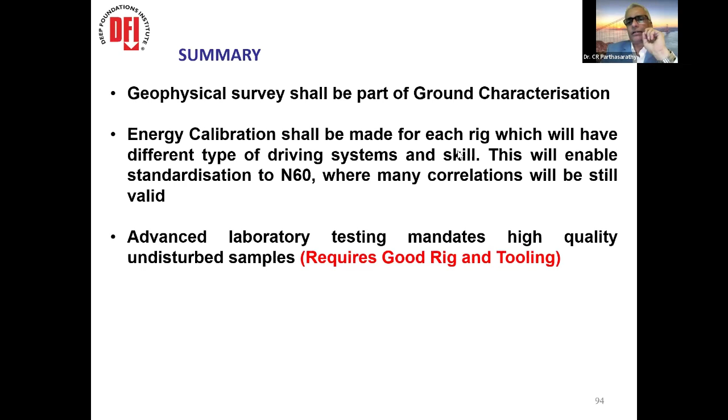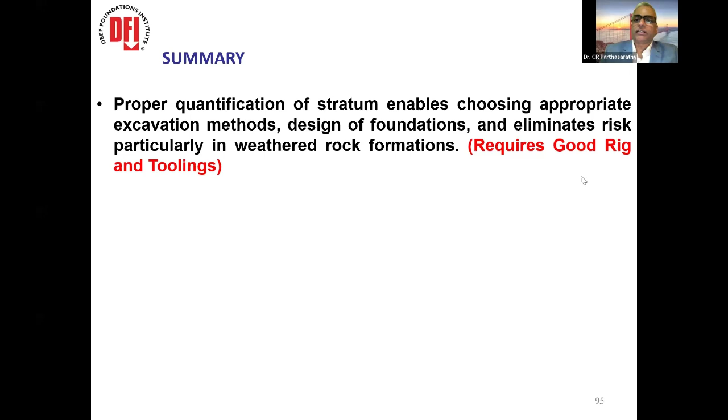Energy calibration is very, very important to normalize the N values. Advanced laboratory testing mandates high quality undisturbed samples. So this requires good rig and tooling as well. At times use proper machines and tools, including triple tube core barrel. Otherwise you will end up not having any samples in those intermediate layers or a transition zone, and a lot of conflicts and hazards. Proper quantification of these materials enables us to choose appropriate excavation methods, design of foundations and eliminate risks.

Right now we need to migrate to electronic methods. We are talking of technology. Every location should have a GPS coordinate, automate many of those processes, digitize the existing database and benchmark the usable. So we have some problem of using large database. Last 30 years we have collected, but benchmarking the quality of data is a serious concern for us because it's not uniform across all the information that is available.

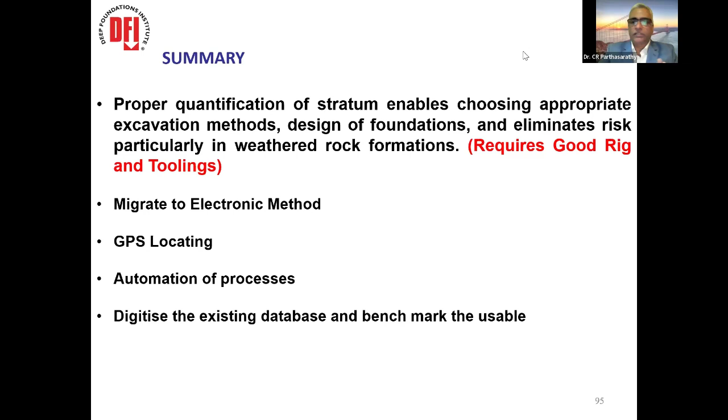So at least if the standard practice is carried out on the site, at least from now in the next 3-4 years, probably those data are usable data, and then we are talking to train the models using AI and ML, develop a robust data acquisition system. One thing I want to emphasize, ladies and gentlemen, we need to have qualified, trained, certified, skilled resources, no matter what, that should be deployed to the project, which will eliminate a lot of risk to a great extent, and it will save a lot of money, time, and efforts.

India is going to contribute for the global development, and I'm sure it's each one of our personal and professional responsibility to ensure that we build the next generation engineers. So I try to acknowledge Dr. Mauli and Ms. Minu, who tend to pull out these informations and put it in the format. They also have contributed to one chapter on this book, chapter number 17 on soils and rocks of Karnataka state. So please go and get this compendium so you can get to know the detailed stratigraphy of the entire country.

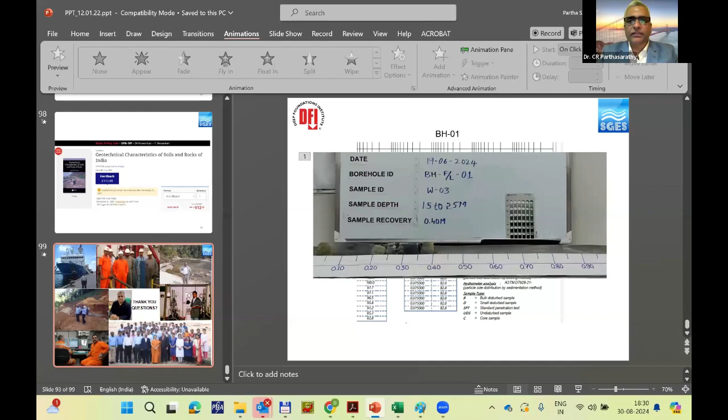Dr. Partha, thank you for a detailed talk. Starting from showing the examples of various problematic conditions, and then you started with the SPT, energy efficiency related issues, and then moved on to the rock coring, rock related issues, and then a couple of case studies really highlighting how different soil investigation agencies are giving different results and what care should be taken. And it's really alarming to see the practice, what's been happening. If you are not paying enough attention, where we end up, all the projects where we end up. It's really good to know that some of these projects are spending more time and more investigations to get more details and optimizing the foundations. That's good to hear.

Yeah. One thing I want to tell everyone here, you see, there are few case studies, maybe 10 projects, right? If you sum total the cost of those projects, okay, and the amount of money that you wanted to do the right thing in the first place, this is very, very small money. Although initially it appears to be big, it's not so. So I think we need to change our mindset and bring in specifications, using technology and the right people on the job that can actually take away all the risks that can come into the project.